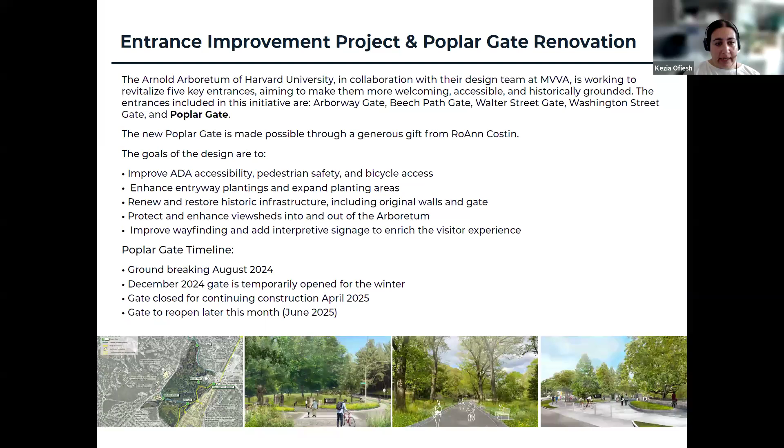All right, let's go into the Oak Allee. Our scope of work for this renovation is to repave the path, restore the cobble swales that are there but currently under the asphalt, protect the existing trees, and improve stormwater drainage.

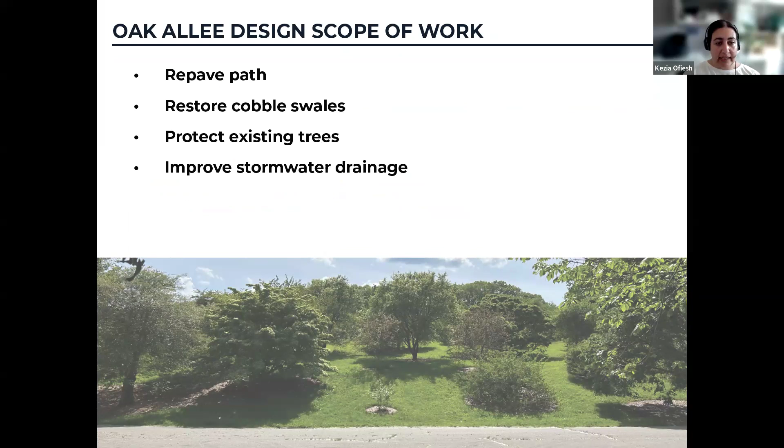During that phase, we'll also submit drawings to BWSC. We're aiming to go out to bid this fall and start construction in the spring, and we're estimating a construction cost of somewhere between $550,000 and $850,000, depending on a couple of factors that KZLA will discuss shortly.

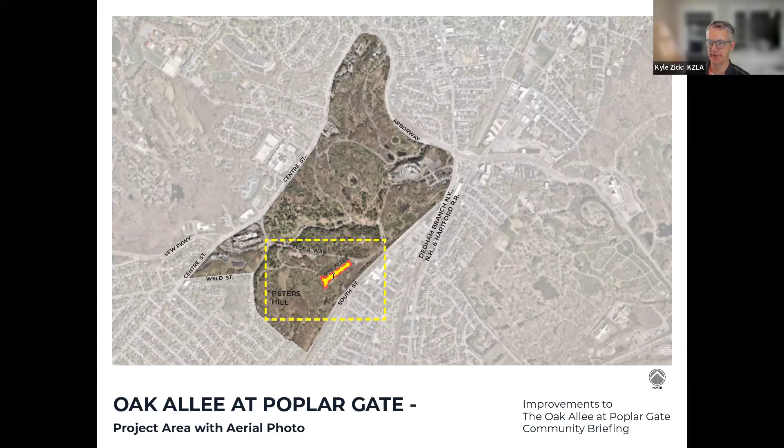With that, I'll hand it over to Kyle to present the design project. Thanks, Kezia. I'm sure all of you know where this is, but we'll start with a little orientation. This air photo shows the entire Arboretum, bounded by Centre Street, the Arborway, South Street, and Flora Way. What's highlighted in yellow is the Oak Allee, which is just off of Peters Hill Road.

The Oak Allee is about 750 feet long, picking up from the Poplar Gate project that Danny and Kezia mentioned, and comes up to the Peters Hill Road intersection. It's called the Oak Allee because it is lined with oaks on each side of the path.

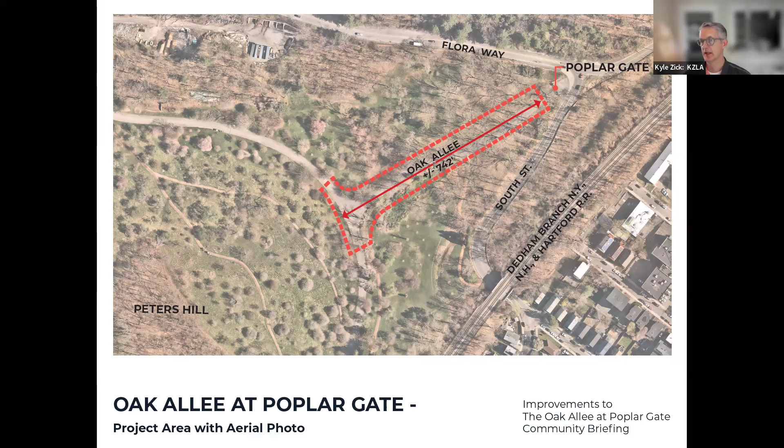We have good documentation of what this looked like originally, which guided the Poplar Gate project, and we're going to take cues from that as well. Here's a picture from 2023 of the Poplar Gate prior to the work that's been done. The pavement's been redone, the cobblestone swales restored, the walls rebuilt, the gate refurbished, and we're picking up from there. And here's an image from 1905 of that same space. Quite a bit different.

The trees hadn't grown up, and you can see a large shrub understory. As part of the investigation and design work for this gate, they knew you could see cracking in the pavement, and historic photos indicated there was a cobblestone swale here. So they did some test pits to confirm it was there and what it looked like, so that in the design drawings they could replicate or reset what was there.

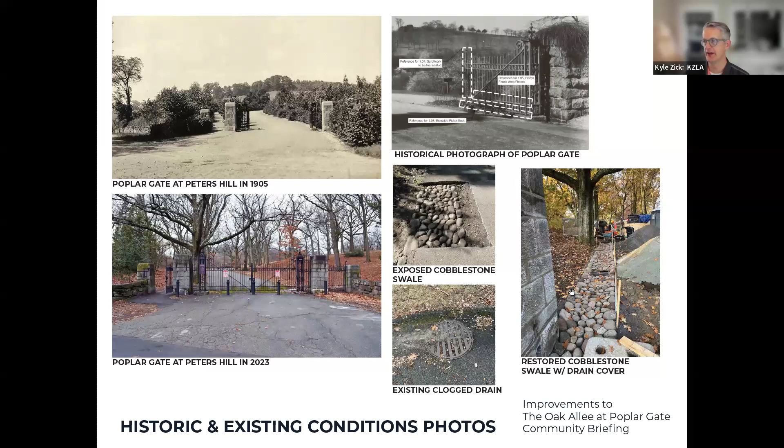So as we launch into our part of the project, just uphill of the Poplar Gate, it's pretty simple and straightforward. We have just under 30 feet wide, I think 28 feet wide, asphalt path that needs to be repaved. We do have some options on how we do that, but we would like to expose the cobblestone swales on each side, and we see that same cracking in the asphalt to know that it's there. We want to improve and repave the asphalt, have the cobblestone swales, and of course, protect the trees.

These views are looking back down toward Poplar Gate, or looking up the hill. Very different seasons, obviously, but still the same space.

And I mentioned trees, and of course, with the Arboretum, we're going to have even more awareness on protection of trees than a typical project, although it's an important thing for any Boston Parks project. But you can see that the trees are very close to the pavement in what is the cobblestone swale here.

So we're taking that so far as that we're going to do a test pit fairly soon and peel up the asphalt next to one tree to better understand how deep the tree roots are below the existing pavement, so that we can have a very prescriptive repaving specification, so that a contractor doesn't come in here and dig right up against these trees, or even here if we find that there's tree roots, to do this in a sensitive way. And that information will help guide us what kind of pavement to propose.

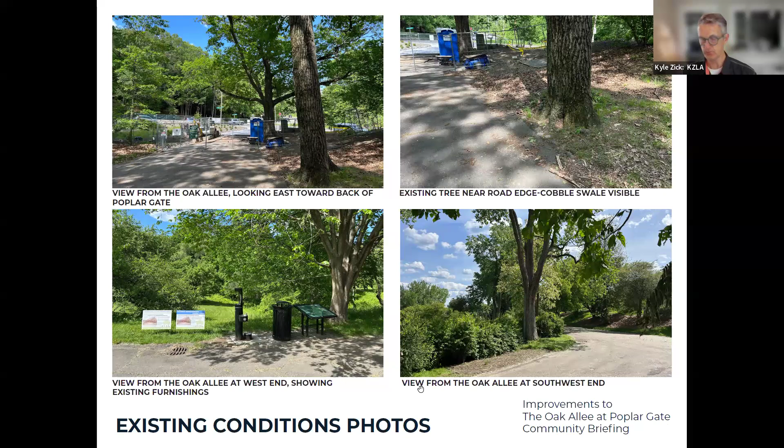And kind of back to the idea of tree protection, we will encircle each one of these trees, or maybe collectively protect them with either a chain link fence or a movable fence like this that has a weighted base, to protect and prevent contractors from getting near the trunk, but also more importantly, the critical root zone.

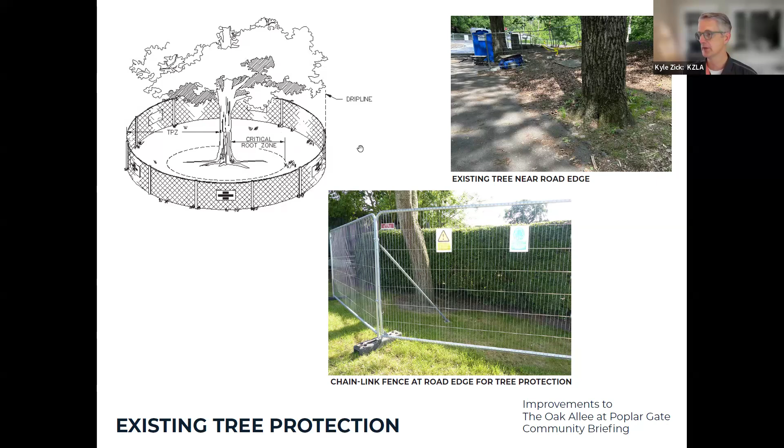And we knew that early on as we stepped foot on the site, but acknowledging that we are not going to regrade this path to be less than 5% because of the impact it would have on the trees. So Boston Parks and the design team met with the City of Boston Disabilities Commission to talk about this and say, all right, what are our options? We want to do the right things, but we have a lot of constraints here because we want to protect the trees. Generally, the thought was to make people aware at the bottom and the top of the hill with signage to explain that the path is over 5%, and have a resting point somewhere at the midpoint of the climb up the hill.

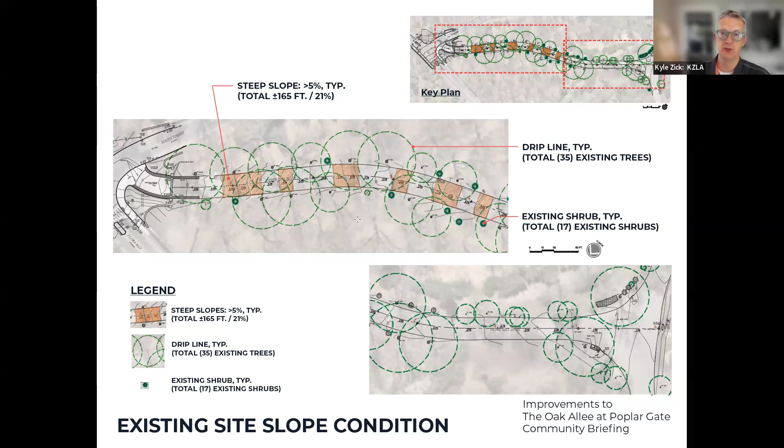We're going to peel up a 15 by 15 foot area next to one of these trees and see where the tree roots are. We know they're definitely out here in the lawn, and you can see some cracking in the pavement indicating tree roots are under here, but typically they wouldn't want to be in the gravel base of that asphalt. We suspect with a deep-rooted species like oak that they will probably be under or in that gravel subbase. So with that information, we'll do everything we can to protect those roots.

So what does that mean going forward? Same orientation, same graphic. Here's the key plan with Poplar Gate on this side, Peters Hill Road on this side, and we're enlarged and split up into two pieces. There are two shades of gray here. The lighter gray is asphalt paving, and we're saying specifically that could be asphalt or pervious asphalt. And there is a difference.

Asphalt is what you see typically on that path today and in any of the city roads. We're considering pervious asphalt because it would allow water to drain through the pavement into the ground instead of just draining downhill. That water would then be available to the trees, but also it's helping larger scale goals in terms of mitigating flooding in the urban setting.

This goes back to our test pit, because if we find that there are a lot of tree roots that are fairly shallow under this pavement, we will probably not do the pervious asphalt system, because that system requires almost a 2-foot excavation and backfilling with a gravel area for storage of that stormwater. Otherwise, if we find that the tree roots are shallow, we will basically peel off the existing asphalt and put back a new layer of asphalt on top of the existing gravel subbase.

The difference, but it would be common to each one of those options, is that we expose the cobble gutter, because the tree roots are not impacted by that at all, since that gutter already exists. We'll have to reset some stones, I'm sure, because they're going to be heaved or some may be missing.

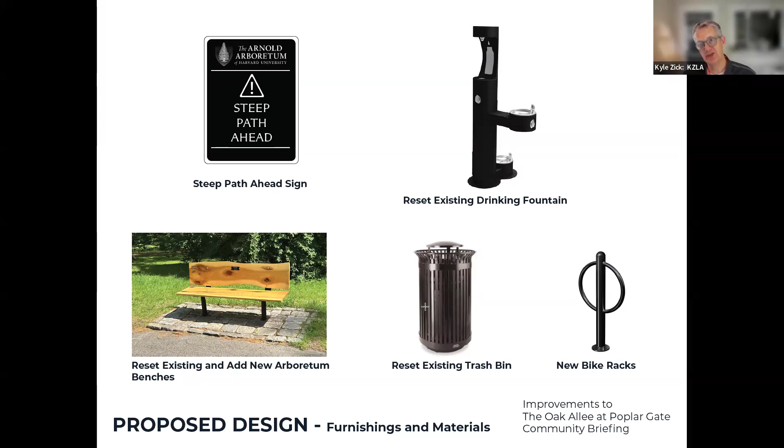So that's an overview of a fairly straightforward project. I know there's been some questions in the chat. I'm happy to answer questions you have on the scope of the project or the things we're proposing.

Great. Thanks, Kyle. Yes, if you would like to go ahead and talk about people with a walker or a wheelchair or other device accessing the bench from the path over the swale.

Yep, that's a good point. So we've had that same circumstance at Franklin Park, and acknowledging that the rounded cobblestone we will have would not be an accessible surface to cross to get to the bench. What we did at Franklin Park is we flattened out this swale to make the slopes compliant, but that was different because this block was regular enough that we could do that. So more than likely we will either pave over, or we could take these cobbles and cut them to have a flat surface and reset them. But we will make an accessible route that's compliant from the asphalt path to the bench pad.

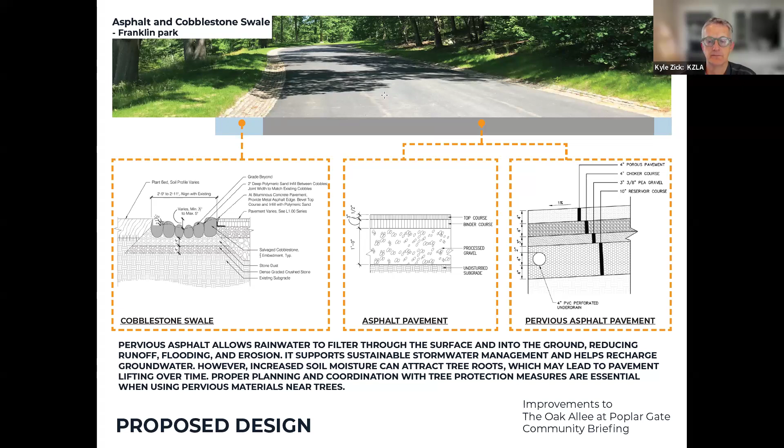Are you muted, Kezia? Oops. Sorry.

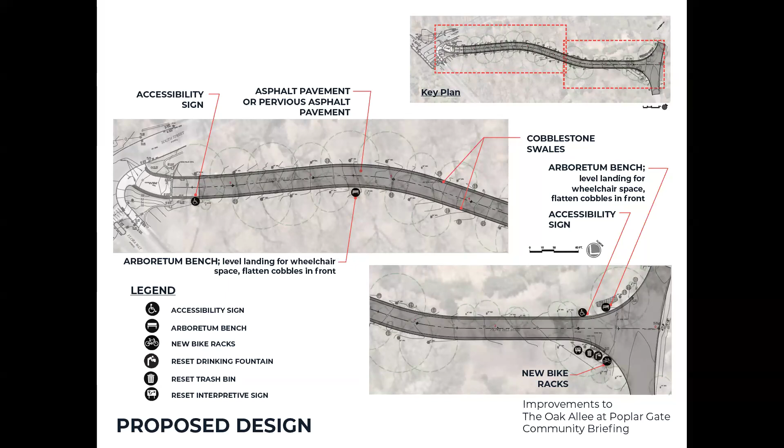Kezia, we have a comment from an individual named Jan. She said it's been exciting to see the progress so far. I'm a local resident without a car. I do love biking through the winding main Arboretum paths, but having a more direct path to and from Forest Hills would be a major plus, when I've got CSA veggies to haul up the hill back, that can be a lot with extra weight. Thank you.

Kezia, would you mind if I just respond to some of the comments regarding the parking at the gates? Yes, that would be great. Thank you, absolutely.

I just want to let everyone know that as we remove parking from the gates, which was not a historical feature of the entrances, they were made to welcome people in, not to allow them to park there, and became parking lots over the years and paved over. As we remove that parking, we're also working to continuously advocate to the city to add true accessible parking along major corridors, including Flora Way. In fact, we're advocating an entire reconstruction of Flora Way, which is in really rough shape. The sidewalks are crumbling, there's no parking marked out, especially not ADA parking.

I did get confirmation from the Boston Transportation Department last year that they would put in an engineering request for some short-term ADA parking at what used to be Bussey Gate. So I would point you towards that as the next best semi-accessible entrance. You can also call into our visitor center and get driving permits if you have accessibility needs that allow you to drive through the Arboretum and see the spaces. But we're very aware of the challenges as we remove parking.

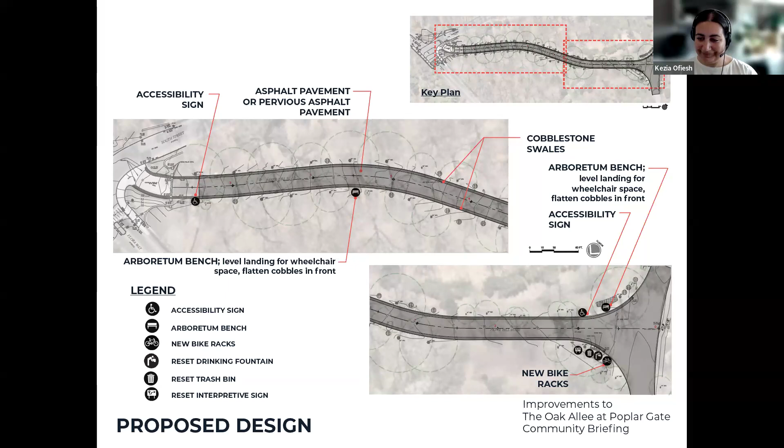Well, Kyle, maybe we could go to the last page. So we have a QR code here that just takes you to our project website. It's boston.gov/poplar-gate, but it does refer to the Oak Allee, not the gate improvement project.

Shoshana says, this area of the Arboretum is a huge part of my life, and I'm grateful to everyone who stewards it. Thank you. This is nice, very nice.